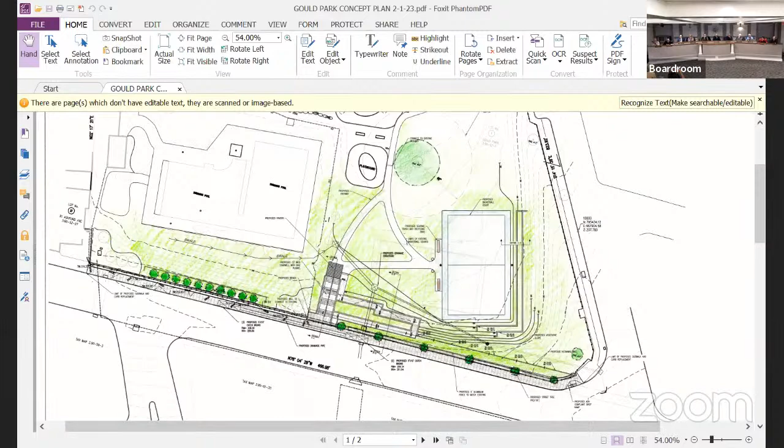In addition, we've done some landscape seating. Those of you who've been in the village for a long time may remember an interesting seating concept at the corner of Maple and Washington on the lower field, which had amphitheater seating carved into the hill. So we're going to reintroduce that idea here at the park.

So I'm going to let Suzanne and Anthony take over from here. But the focus for tonight is really two parts. One, I would like the planning board to be a part of any village-related project going forward. I mean, it's just obvious why, you all know that. It should have happened many times in the past, and it will happen in the future, so this is the first of those.

We just want your input, because you've got a lot of value to add to our projects. We want those voices in these projects, so give us your feedback. We'll take it back to the committee, go through all these things. If we have questions, we'll come back to you. But we'd really like to embark on the design phase.

Anthony, we keep giving him harsher and harsher deadlines, but we aren't giving him the go-ahead to start his working drawings. So the idea is we want to give him some guidance here, and as we develop it, we'll come back to you again, maybe a little less formally. We can work that out as we go forward. So I'll let Suzanne and Anthony take it.

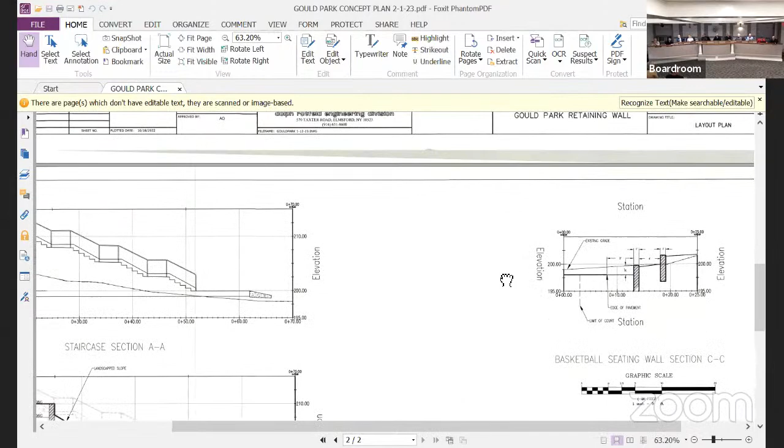There are some cross sections here just to give you a sense of the scale of the steps — again, this is at a conceptual level. This is a cross section through the ramps. It may not make too much sense, but it shows how the ramps step down, the two switchback levels of the ramp, and starts a cross-section on the seating here.

I think the seating steps were about 20 inches high. Trustee Patino mentioned the subcommittee has been working with us and started looking at materials, but there's really no consensus yet. I think it's gravitating toward more of a natural stone finish, but steps would probably be poured-in-place concrete. There's talk of different tread materials and so forth, but that remains to be seen.

What we're really looking for at this point is to get the program down so we can move into design drawings on this. But that's it in a nutshell. I don't know, Suzanne, if you want to add anything on where the landscaping would go in your view.

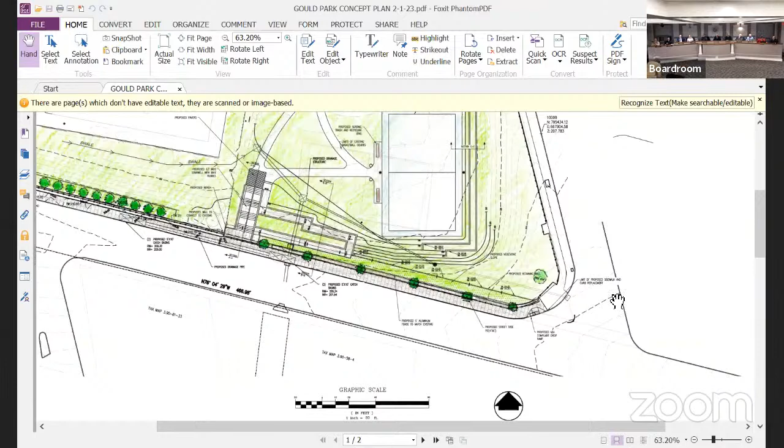I'm Suzanne Nolan. I consult to the Village of Dobbs Ferry on landscape architectural issues. Getting involved with the subcommittee, there was an opportunity to start connecting disparate interventions that were being considered in the park.

There's some screening that I had worked with the Parks Department on, looking at for the pool area, because there's been some talk about needing screening for pool users. That was an opportunity to start looking at this more comprehensively rather than just placing different things in the park.

Working with the subcommittee, the idea came about that shifting the basketball court — realigning it, even shifting it into the slope — would allow for this terraced approach to the seating, which would also allow for a more open feeling in the center of the park, enabling a more elegant connection between the playground, the new entrance, and the basketball court.

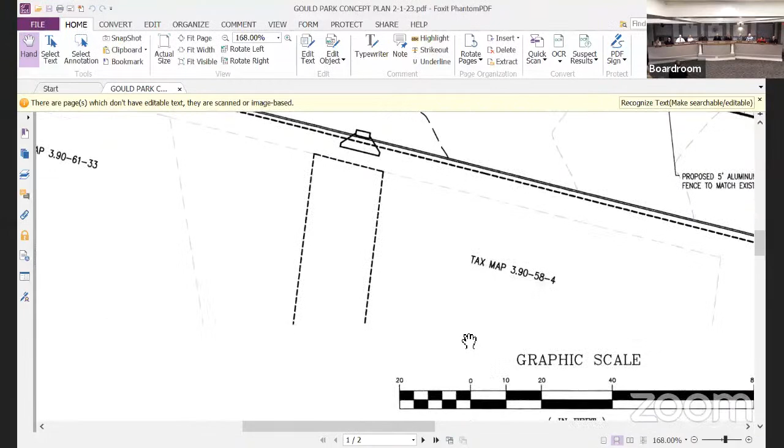But I feel like it's worth some study to figure out how much you can make the ramp feel like it's working with whatever the new grades are. That would be the only design-related thought I have. It would feel softer, more organic with whatever you're doing with the topo.

I just realized I did not show this elevation. It's kind of long and flat. But looking straight head-on, maybe I can make it a little larger. From the park side, looking at the stairs and the ramp, it's pretty gradual. By the time the ramp gets down, we're pretty much at the flatter area. There's a pretty sharp slope in front of the wall, so there's not a lot of topo to work with other than that first 20 feet maybe.

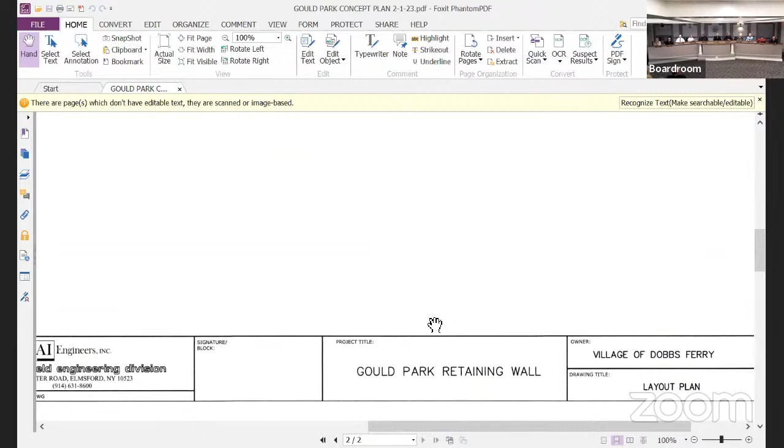Good. Well, thank you very much, Michael, for sharing that with the planning board tonight and with our audience. And we look forward to enjoying our new park in the spring or summer or whenever.

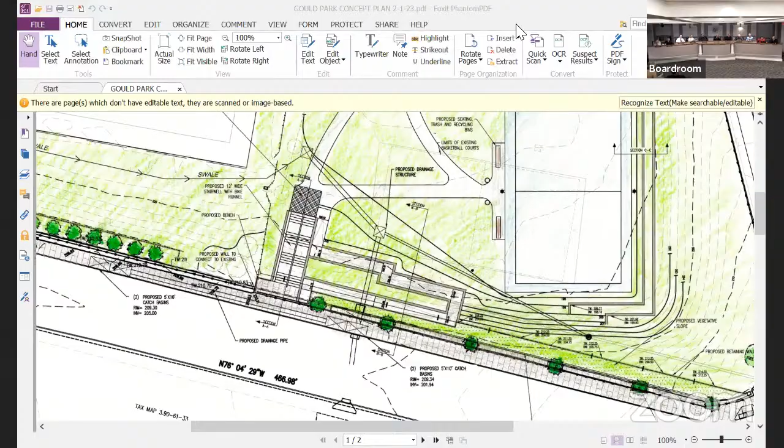Thank you. All right, we will move to the agenda of the planning board. Our first item, number 1, is North Mountain Drive, a pre-submission conference for proposed plans to construct a new home on a vacant lot.

Good evening, as they figure out the technical issues. Yes, I will entertain you. Good evening to the audience.

Chairman Hunter and members of the planning board, Kristen Wilson here representing the property owner, known as the Golio residence. You might be surprised to see us back here so quickly. At our last meeting, you sent a memo to the zoning board indicating that you did not see a reason why you cannot fit a single-family home on this lot.

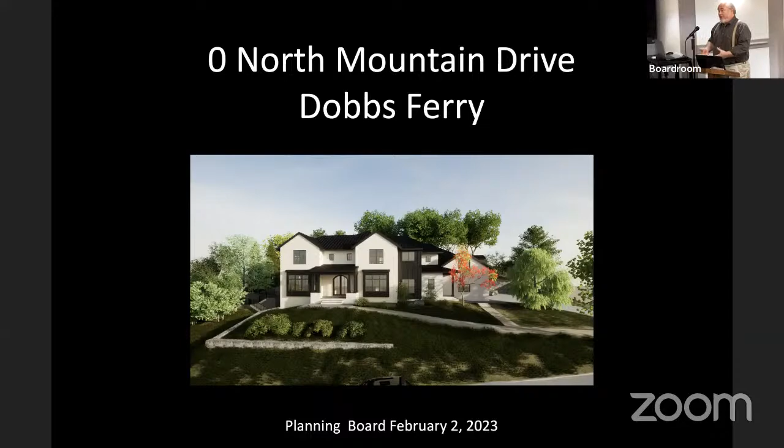And what we've done, because we are now actually looking for you guys to call for a public hearing and actually make a decision on the site plan, we've advanced this a little bit so that we've got things further developed than before. I'm going to try and skip most of the stuff we've already looked at, but if you see something you want more information about, some of these I just included because there were questions Anthony had about drawings and what we were submitting. I think we're in good shape with all of that now.

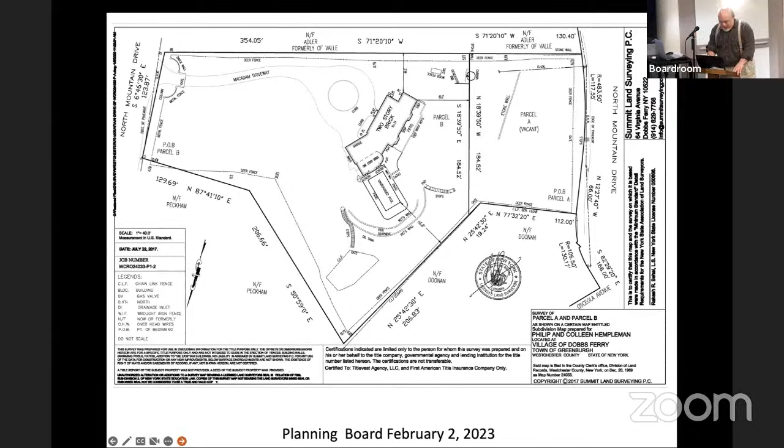I think we still come down to the same six primary concerns that were identified by the zoning board initially and then addressed by this board: stormwater management, vehicular safety, size of house, site stability, and landscaping.

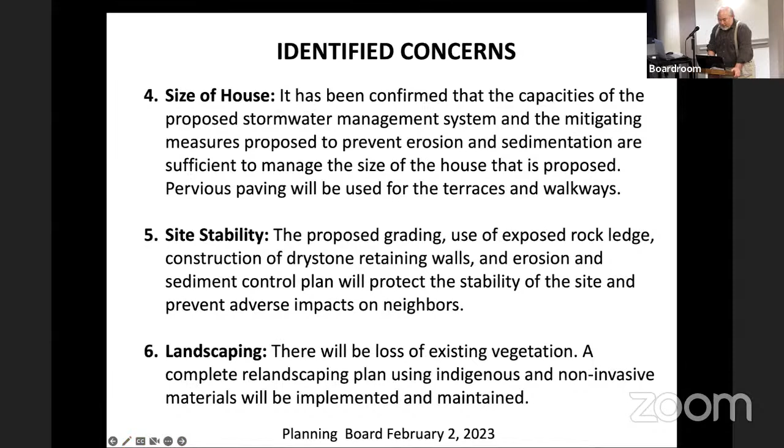And what we've done is we've brought the engineers in to get more involved. They have submitted their drawings, whether it's erosion, sediment control plans, or stormwater plans, and those have all been submitted to Anthony's office so that he's been able to give a review.

We've got a letter from him, and there are some things he thinks need to be dealt with, which I'm sure they do. We can certainly handle that between now and the next meeting. I also got Valerie's comments. I differ on one point, but I don't know if we should get into that during the meeting. It's just an interpretation issue in the code, but we can talk about it as we go.

What Hudson Engineering has done is design a stormwater storage system, retention and detention, that takes all of the water and dissipates it on site. So it has the capacity to handle a 100-year storm.

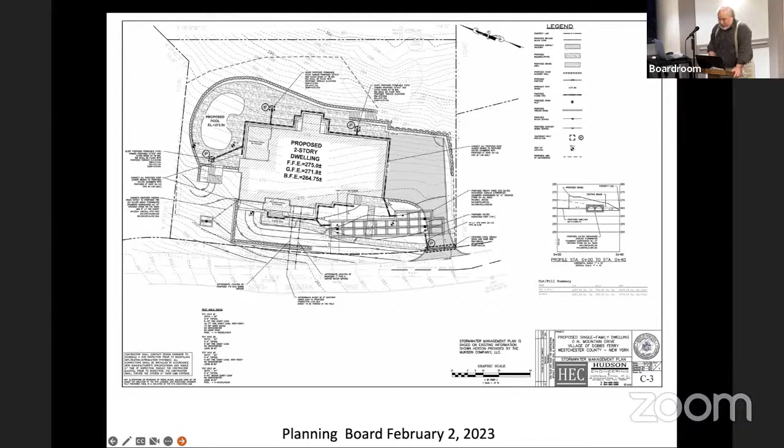There is one concern that Anthony had, which is that they're showing 8.5 feet to the property line when we've said it should be 10. My understanding is we do have a little bit of jiggling room with that. We can get it to where we're 10 feet from the property lines and 10 feet from the foundation, so I don't think that will be an issue.

One of the other concerns that was expressed—here's information on the storm drainage confirming that they're designing for a 100-year storm event from the watershed and keeping it on site.

One other thing I wanted to point out was a comment some members of this board had, about doing some things with permeable pavers. So what we've done is shown permeable pavers for all of the walkways and the terrace around the pool.

We have not used the capacity of that storage system as a way of reducing the Cultec. The Cultec stays sized for a 100-year storm, but in addition, all the water that falls on the terrace will be able to capture at least a 10-year storm.

We're basically coming up with around 5.2 inches of rain that could fall on that before—we're getting that about every 3 weeks, right? So we'll be able to take 5.2 inches of rain falling on the terrace without it having to go immediately to the Cultec units.

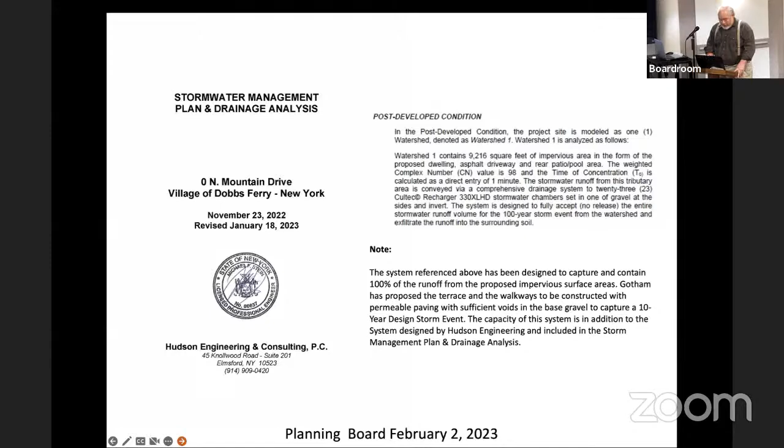We will need under drains in the event that it doesn't percolate in, but that all seems pretty straightforward to do. This is just information that was in this—

You've gotten this before. The perception is that this is a mountain of rock. The reality is we've dug test pits that are 8 feet deep in dirt without hitting any rock, so it promises to be good. They did that in the area where they're showing the Cultec units, where the actual grade is substantially less than 15%.

They found the one place on the site where you could kind of fit this in. There are a couple of little smidges of green hitting it here and there, but we're not trying to put something on a steep slope site.

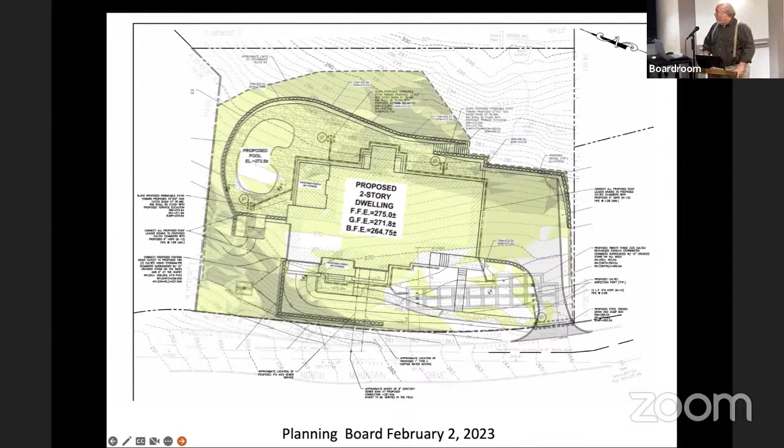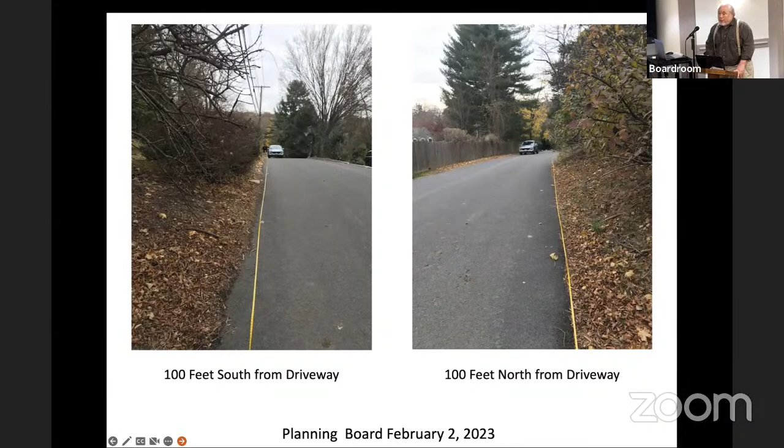One of the requests Anthony made was that we provide a profile of the driveway, which we actually had already provided. That was in there, so I think we're good with that stuff. We also made sure we've got good visibility up and down the street from the location of the driveway, so I don't think the board needs to have further concerns with that.

This stuff I'm going to skip because it's actually what I'm going to talk about with Valerie, and for all intents and purposes it was not something that we submitted to you guys for review. It just has to do with certain interpretations in the code.

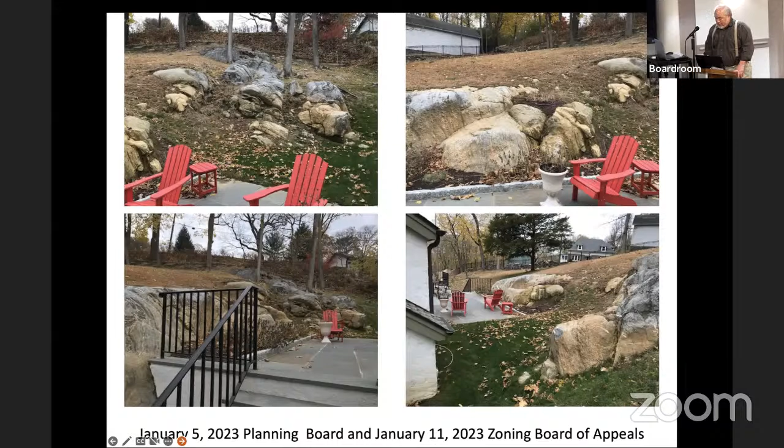Again, our goal is to do what we've done before in Dobbs Ferry. When we find lots of rock, we don't take it out just to build a retaining wall—we use it as the site. Of course that means we'd have to submit drawings showing all of that to the building department so they can be satisfied with how it's been done.

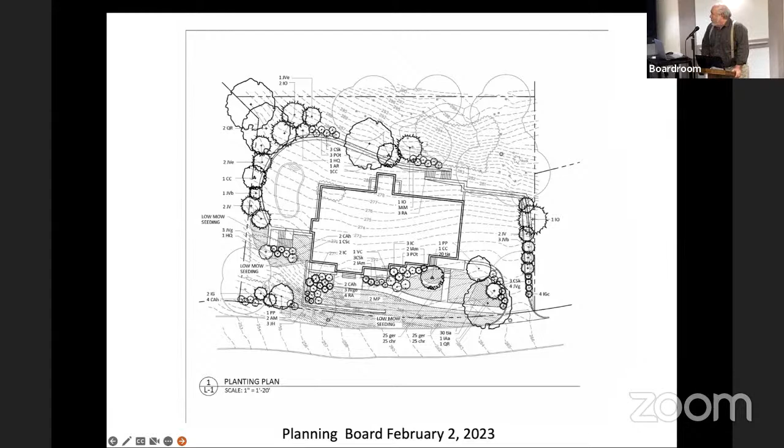This is the landscaping plan. There was a comment that this was underdeveloped, but I'm not really sure. Actually I'm a little concerned whether we'll have to go to more than one nursery to get all the plants for this property. It's a fairly extensive landscaping plan with material done by Susan Janchill, who's very experienced with this area. We've worked with her a lot and she does good work.

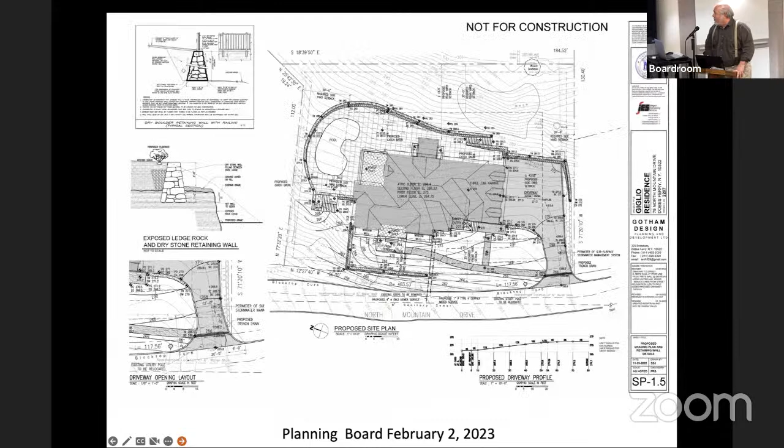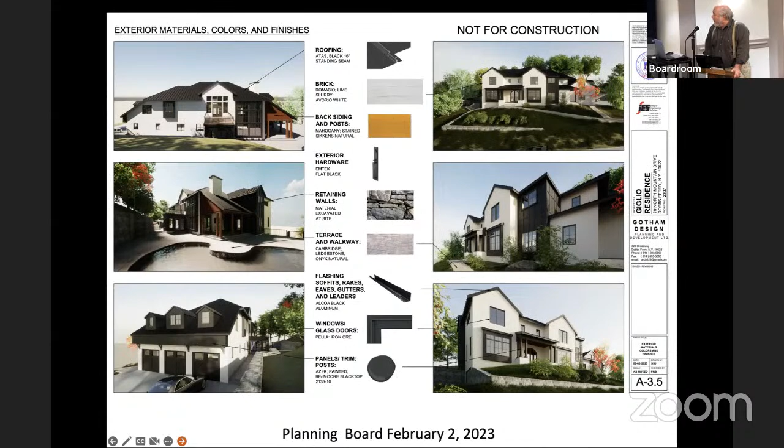These are the drawings we submitted to you, taken a little further. I don't think we need to bog down since you've already seen all that. We've taken the drawings up to quarter-inch scale, with elevations now relatively complete with detailing, material selected, colors, all of those kinds of things. Still noted not for construction. Basically it's a brick and stucco building with additional pieces done in a panel stained a very dark black, like a blacktop color. We also have some wood elements to soften it, but it's a look the client specifically requested. We've taken some of the images up so you can see them better. This goes into what all the materials are, which we'll have for the public hearing.

And then we've got a number of images showing how the house sits into the hillside.

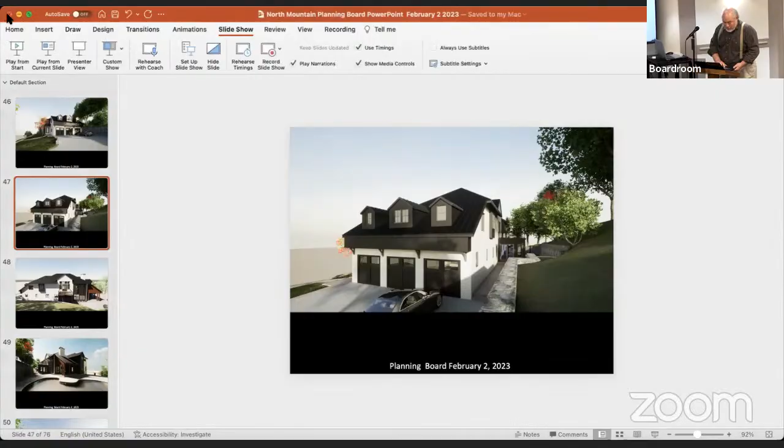If something didn't go wrong with this presentation and the equipment, I would be disappointed.

Patty, I go up and down North Mountain once in a while because it's curling season, and I have yet to really identify where your cut is for the driveway. We could flag it, put flags there. That would be helpful, because it's pretty much a big stone wall around those corners. Where the driveway is, it's right on the edge of the property. We're using the topography to reduce the pitch of the driveway on the upside. Well, put some flags where you're going to put your driveway, because it's not at all clear to me where that would be. And if you call for a public hearing tonight, I'll put another sign up.

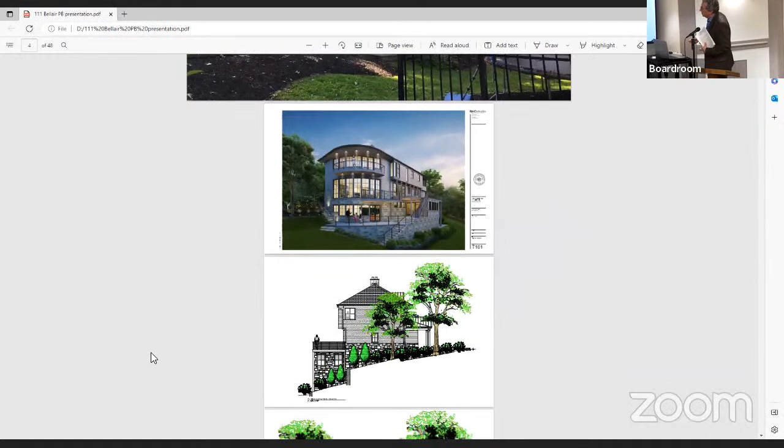And then we're also proposing an addition underneath this deck, a sort of basement level addition, and an addition on top of the garage, which was shown in the previous slide. If you scroll down a bit more you can see the rendering of the back elevation. This curved portion of the addition is essentially where that curved terrace is on the existing house.

The main body of the house going south is essentially the same as the existing massing, with the exception of this cantilever portion on the second floor. And then again, there's the addition on top of the garage, which you can see just a little peek of in this rendering.

And then there's stone terracing as the property drops down towards the west. And of course, this elevation is meant to take advantage of the nice views of the river and the Tappan Zee Bridge, which is off angle from this elevation.

This is an elevation of the south elevation of the house, because we don't have that in the rendering. As you can see... oh, I have the cursor, sorry, I'm trying to point at the screen. Oh, I can't use the cursor. Anyway, so...

This shows an addition above the garage. That little window is the existing garage, and in fact that small window is there now, just more or less the same size. We did receive, I failed to mention, we have a covered front porch as part of the addition, which we received a zoning variance for.

It actually basically complies with zoning regulations because the zoning permits a covered porch that extends 10 feet out into the front property line and is no more than 50% of the length of the house. This is slightly more, I don't have the exact number, but about 12 inches longer. So as I said in the zoning board meeting, it complies with the spirit of the code, certainly.

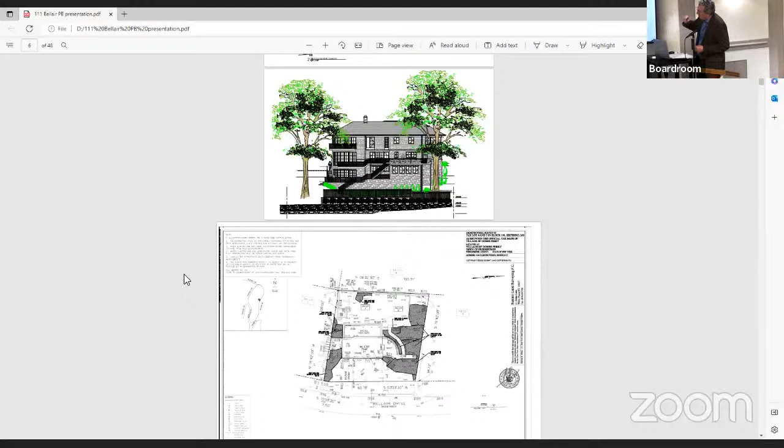If you scroll down to the next slide, this shaded area at the top is the extra area we can allocate toward what was the steep slope area underneath that fill. The average grade from the base of the house to the existing stone retaining wall is 14%, so we are most certainly lower than the 15 to 25% grade that this shaded area designates.

In addition to the additions we're proposing, we're also proposing to put pervious pavers on the existing driveway and create a little parking area to the south to comply with the requirements for 2-car off-street parking. It's also nicer for the owners to have the cars side by side rather than stacked back to back.

You could go to the next slide.

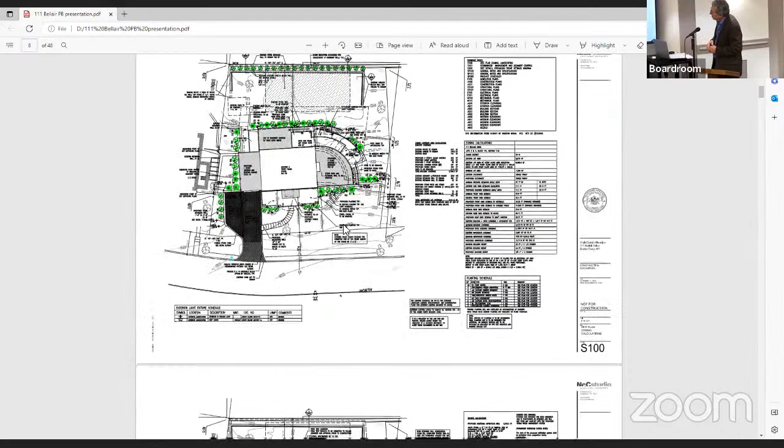As part of when we were here last, we were requested to do a perk test. We had an estimate of what the likely perk test would be based on other projects I've done, and we accomplished that. It's actually slightly lower than what we anticipated, which would allow us to take out one infiltrator and add a little more gravel, but basically it's the same proposal.

I would also point out that the infiltrators I have will accept all the stormwater from all the impervious area on the site, including the existing house. Typically you just provide stormwater management for the new impervious area, but we're providing it for the entire area, under the assumption that the existing dry well system is not adequate or not functioning properly. Although there's no sign on the property of any significant stormwater drainage problems, in any case the new project will manage all the stormwater as required.

This diagram shows the section I was referring to, this area here. This is the existing slope average grade, and this is the slope coming up prior to the addition of the retaining wall and build back, at 14%. We're pushing this wall back, and this is the slope we are allocating that extra steep slope area to, which again is in excess of the actual steep slope that existed prior to the building addition.

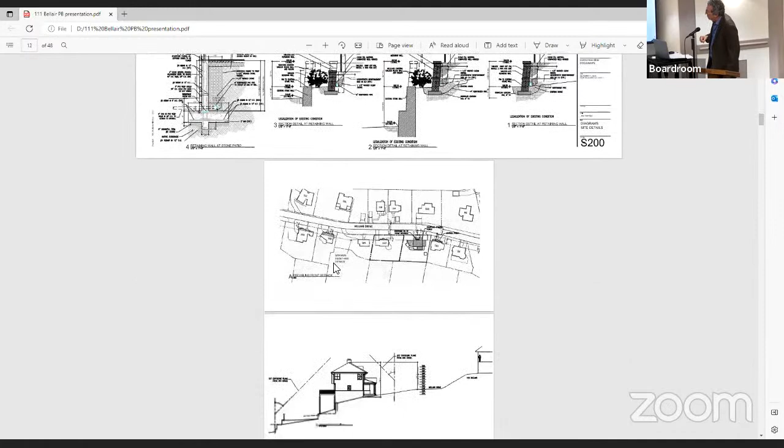That's meant to be an enlargement of the diagram on that plan, again showing the existing and proposed footprint of 111 Bellair and the adjacent houses.

One thing that was asked last time was to verify the view platforms, if there are any in this vicinity, and there aren't. The view platforms are further down as Bellair drops down towards Colonial and Palisade Avenue. There's really some dramatic views there, and this is not the case with this property.

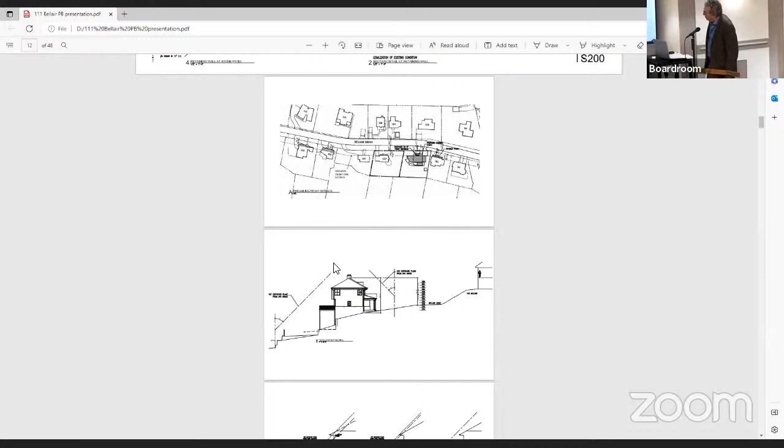Scroll down a little bit more. This is the sky exposure plane, to the south of the property. It shows the sky exposure plane front edge, the southeast corner of the property, the property line to the house. This outline is both the existing garage and proposed addition on top.

There's one taken at the center of the house, which complies, and then one at the very corner, which we're nudging just a little bit past. But if you look at the property, that zone at the southwest corner drops quite low. So as it relates to the neighbor's first floor, and actually the kitchen, which is closest to this, the sky exposure plane does comply relative to that floor height with the current code. I'm disappointed we can't see these bigger.

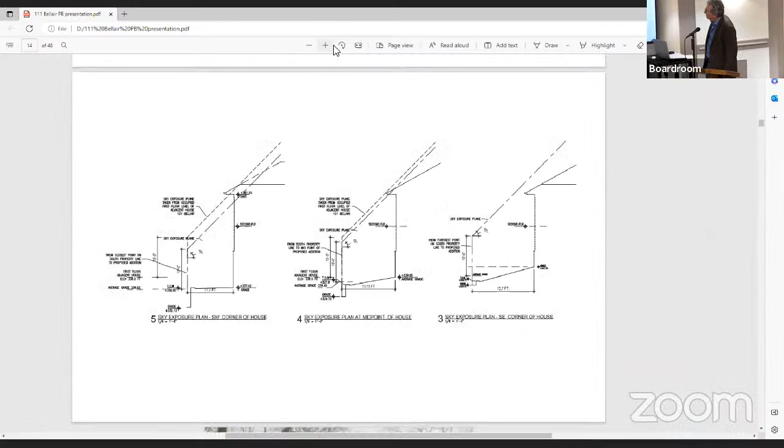Oops, what's happening? Oh, what'd you do? Help in the back, you did something. Oh, you're zooming in a little bit, okay. Yeah, that's good. Oh good, so some technical help from the owners of the house, free of charge.

So again, this is what I was describing. Now you can see it a little bit better, the relationship of the houses, which is not uncommon relative to typical side yard setbacks. And if you scroll further, you see the ghosted image of the proposed house.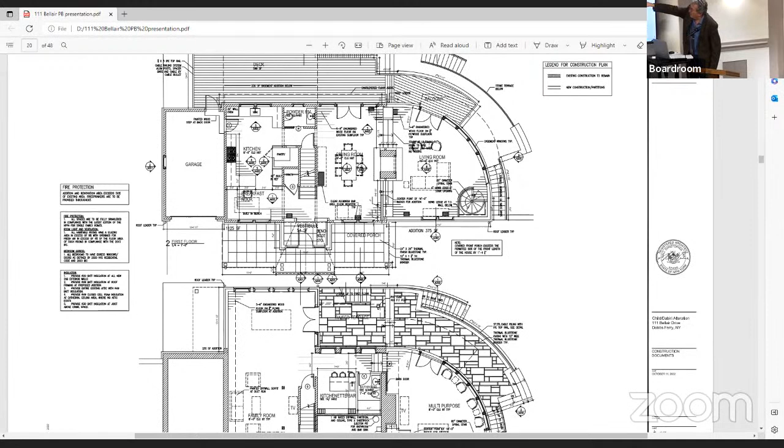It shows again the addition to the right, the curved bit here. That large balcony is really existing, with the exception that we're pulling it back 4 feet from where it is now. There's a little new curved balcony here, and some terracing and stone steps. The covered porch is proposed, and we got the variances required for that.

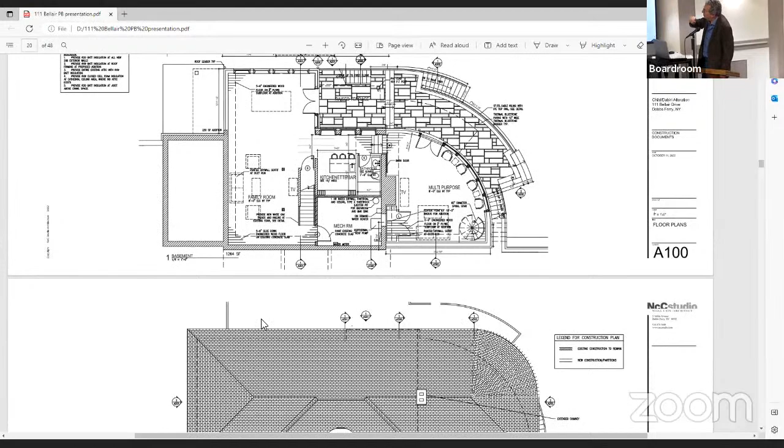This next plan shows the little basement extension at the west side of the elevation of the plan. Just the roof plan, shows the plan of the upstairs, that's okay.

And then this is the elevation. Again, the renderings really show this more specifically or more clearly than the elevations themselves. Again, actually, you can, sorry.

You can see we've made an attempt — the house is 21 feet 10 inches to the top from the curb line. We've really made an attempt to keep it low. This is a large house, but it's by no means massive. It's not out of character with other houses in the neighborhood. One reason the building area calculation comes up as high as it does is...

The code requires that any elevated deck be included. So really, the house could be much more massive and still comply, if there was a 2.5-story structure coming up from where the deck is. So in a way, those coverage calculations are a little misleading.

Yeah, again, it shows— I guess you can scroll down a little bit more. Yeah, this is that side elevation without the nice plants on it. It shows the garage, the dotted line of the existing garage roof, the dotted line of the existing roof, and then we're going up a little bit more.

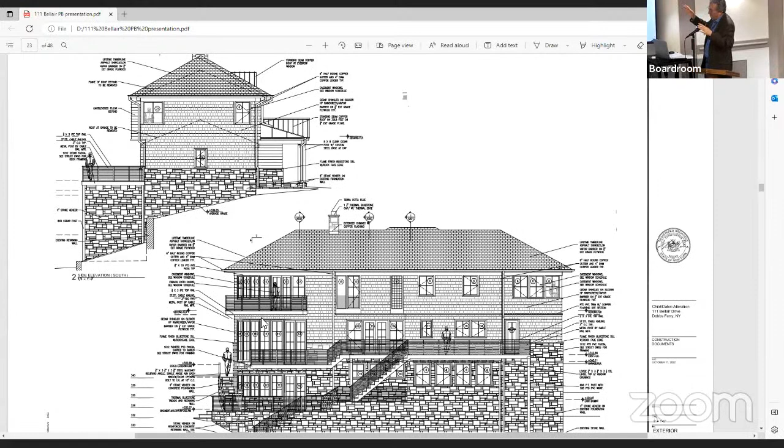One thing I didn't point out in the photographs is that this house is actually lower than the adjacent house at 101 Bellair, which has an occupied half floor. I can't tell exactly how much lower, but if you look at that photograph, since it's a dead-on shot, it shows very clearly that it's actually lower.

Again, back elevation—I think you saw the rendering, the same elevation with the fence in front of it, so it's a bit redundant. The sections through are really more construction-drawing type drawings, and don't have much more information pertinent to planning board review, I don't think. I can certainly describe them if you wish, but I think it's all—yeah, you can keep going down.

And then just a series of photographs. This is the back of the house currently. Again, the garage addition is going to be where that basketball hoop is. This is going to be pulled back. And the deck is being—well, it's going to be rebuilt completely. It just happens to have a similar size, but it's going to be pulled back from where it is now.

This is just an illustration here. When I calculate the sky exposure plane, I'm required to do it from this very low elevation at this corner, which the building code—I didn't print out the language—has language that allows for an allowance for that kind of aberration in terms of calculating the sky exposure plane from a point like that, which is right there.

And everything else other than that does comply, and this one largely complies. Another point I'd make is that with the sky exposure plane, there are allowances such as dormers, which can be 30%, or a third of the elevation, or 7 feet, and this little corner interferes far less with the sky exposure plane than a dormer would.

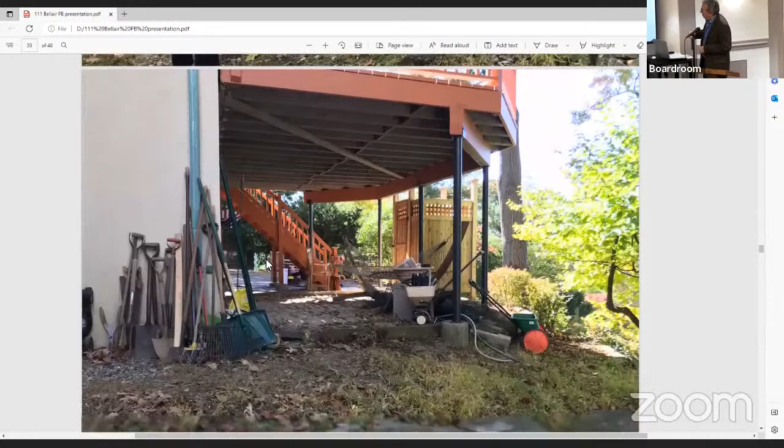This is just the adjacent property from the backyard. They all have these elevated decks, these houses, from the neighbors on either side, just given the topography, and beautiful views of the river.

And this is—I don't know why I put that one in there, actually. Are you going to do bathrooms next? What are you doing? Bathroom, yeah. Is this enough? I don't know. Yeah, it's probably. And then, yeah, this is, I don't know, I just threw some photographs.

Oh, I guess—do you want to see the neighborhood context? Okay, I mean, we can go up. Those are sort of the more—I'm sorry, no, you can go up the other way.

Just because, oh, this is important actually. This is the retaining wall that was built on top of the existing retaining wall. In fact, we started with the premise of, okay, let's try to legalize this as is, and we realized we just really have to push it back and improve the appearance.

So it's going to be pushed back again with extensive planting all the way along the side, and decent size plants. They're not going to have little puny potted plants. The sizes on the drawings, I can't remember exactly, but they're good size plants. And again, the neighbor to the west is very pleased with the proposal.

This is the existing wall. We're going to take this down by 2 tiers, 2.5, hoping. And because when this was done, the contractor was not aware, I guess, that, as many of you probably know, if you start filling dirt around an existing tree, you will probably kill it. It's not healthy for the tree. So we're going to take that all down so that the grade around the tree remains as it was. Take this corner down.

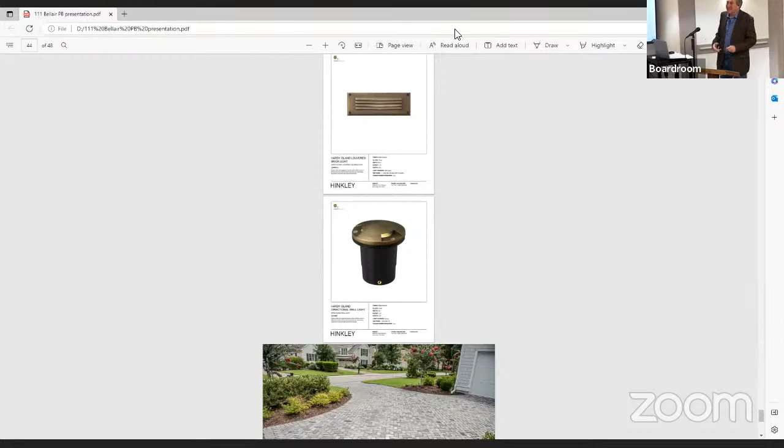The chairman, I'm sorry, you wanted to say something? He wanted to close. No, I was going to say that it's a public hearing, and I was going to ask if anybody wanted to speak. We have some people here. Yeah, present. Well, anybody that wishes to speak, please go to the microphone.

Thank you now. Good evening, Mr. Chairman, members of the board. My name is Stephen Accinelli from Veneruso, Curto, Schwartz, and Curto. On behalf of the owners of 101 Bellair, they are here with me this evening. That's Natalie Trojan and Bruce Jonas. I'd like to start out with congratulating the village for its very comprehensive vision plan, zoning ordinance, and residential design guidelines. I have reviewed them in detail in reviewing this application. And I've also reviewed the pre-submission hearings and also the zoning board hearings.

And I'm here on behalf of my clients in opposition to the application as it currently exists before this board. There are a number of significant issues that this application presents in terms of character, as well as in terms of specifics and technical issues that I think this board needs to really take a hard look at when they review and consider this application.

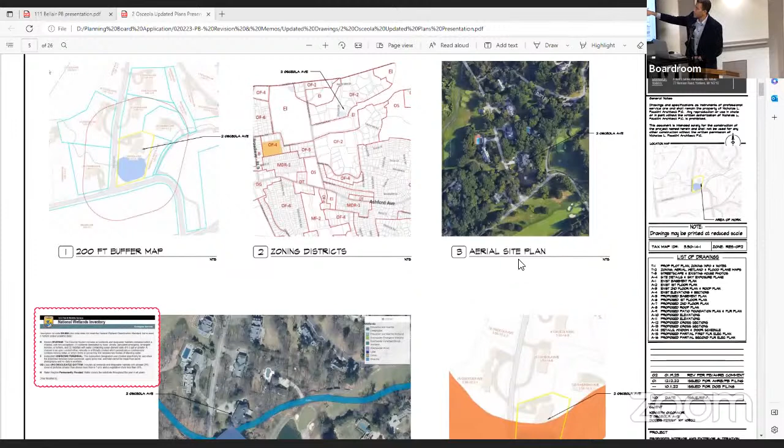So we can start to scroll. This page would be great. Again, we're just showing the pond, the zoning map, aerial view. Down here on the bottom right, if we scroll down a bit more, it shows that stream, as I was mentioning, continuing on the left side, going into the pond and continuing on the left side. This is the 500-year floodplain, which is not subject to the application.

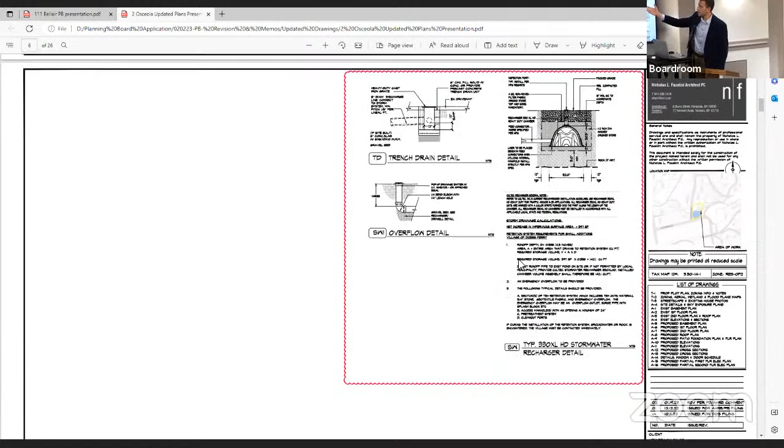We can keep scrolling down. Stormwater management design was introduced. We did receive a memo this month saying the dry well we propose is too close to the property line. We had set it back 5 feet, but we're more than happy to move it to 10 feet to comply with the village code. We have plenty of room to do so.

Can we continue to scroll down, please. A landscape plan was submitted with the initial submission, but the board or planning and engineering didn't have an opportunity to review it, or it wasn't part of the package. This is the landscaping plan—if we could scroll down a bit more. We have plantings shown along the front of the house, along the entrance, in front of the deck, and along the privacy area.

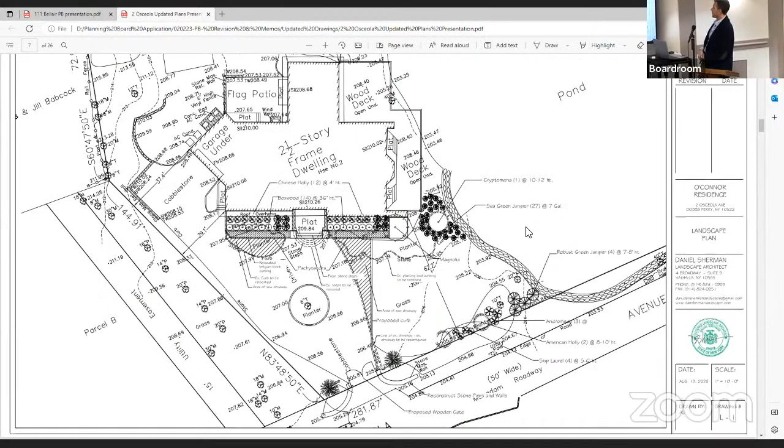A survey was also requested and was resubmitted as part of the resubmission. These are some photos, if we continue to scroll down, just showing the existing home at 2 Osceola Avenue. We have a view up Osceola Avenue, a view of the front, a view of the pond, another view of the pond looking toward the subject house, another view of Osceola with the pond and house in the distance, and some close-up photographs along the perimeter of the house.

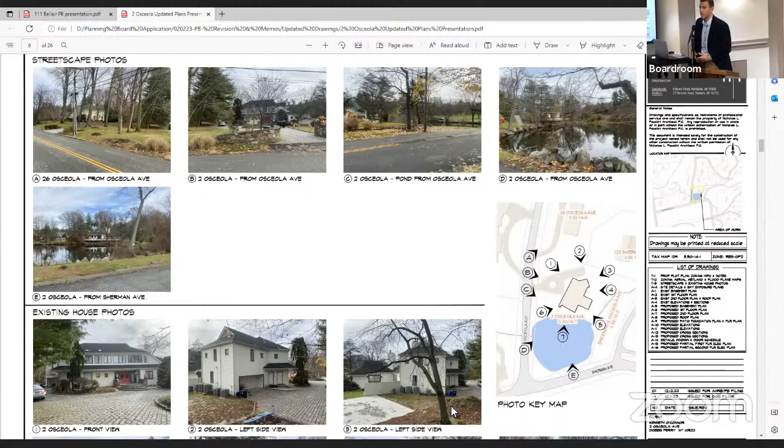The house is somewhat of a mixed contemporary traditional style, built in the late 90s, early 2000s. The owners purchased the house over a year ago and are interested in updating it, bringing it more into a somewhat contemporary appearance. We can continue to scroll down—sorry, this is a view of the pond.

So again, there was concern about being too close to the pond. The work we're proposing involves the footings supporting the elevated deck. So while the deck looks like it's immediately adjacent to the pond, the footings are set back somewhat. There's currently substantial cantilevers on that deck causing deflection—you can see posts underneath trying to push the deck up because the cantilevers are too excessive. We're going to reduce the cantilevers and better support the deck.

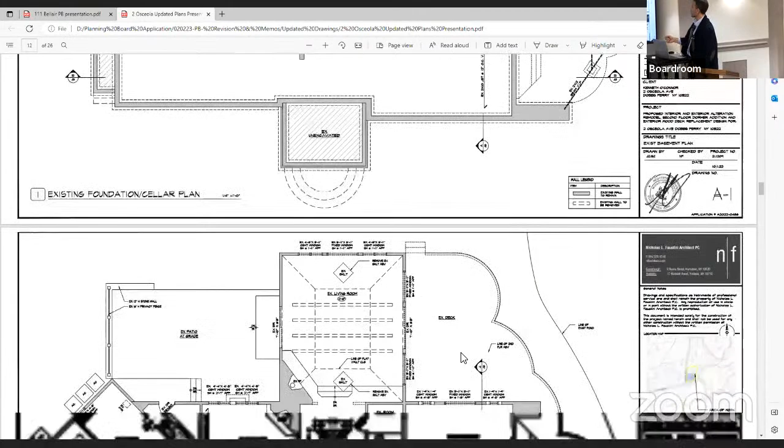We can continue to scroll down. These are just some engineering details, sky plane details, and the foundation plans. I'll go through the old footings, the old outline of the deck, the existing floor plans, the existing second floor, and existing elevations on all sides.

Proposed deck plan, just squaring off the edge to give it more of a contemporary appearance. This is the foundation plan—it's a crawl space with a very small mechanical basement. Keep going down: first floor plan, most of the work is interior. This is the deck plan; it didn't fit on the page, so there's a match line, and you'll see it on the next few pages.

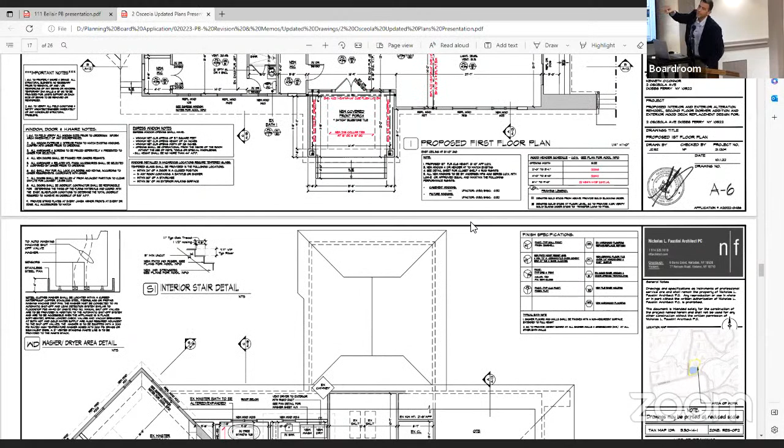We can continue down. We are proposing a portico, a covered portico in the location of an existing uncovered porch area. We can continue to scroll down—there's that small dormer in the back to add a master bathroom addition and a laundry room.

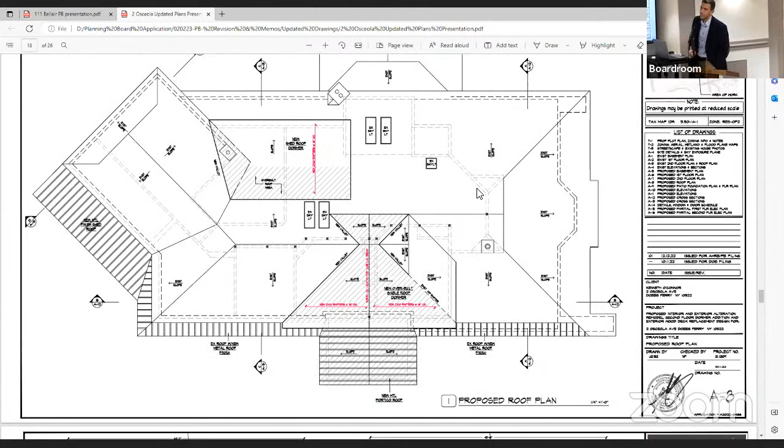Again, the dormer roof lines. We are introducing a new gable dormer just for aesthetics over the front entrance, matching the existing roof lines.

These are the rest of the deck plans off the match lines. These are the new footings. The line of the pond is shown there as well. This is the new deck plan. We can keep scrolling down.

Proposed front elevation, again just continuing the roof line. It's a 9-on-12. We're continuing it straight up, and then returning it back down, just trying to define the front entrance a little bit more. And then we're also creating a front portico.

The roof will be black asphalt shingle. The upper part of the house will be white Hardie panel. The lower part will be charcoal Hardie siding. All of the windows would be replaced with black windows. And we're proposing a metal roof on the lower part, just to give it a little bit more flair.

We can go down a little bit more. This is the view of the pond side, changing the railings to more contemporary railings with horizontal cable rails. You'll see the dormer additions in the distance and the front portico addition on the left. This is the existing roof structure that's going to remain unchanged.

We can go down to the rear elevation. Rear elevation is generally the same, just new siding, new windows as discussed previously, and the dormer that we're proposing over the laundry room. And the master bath is in this general area.

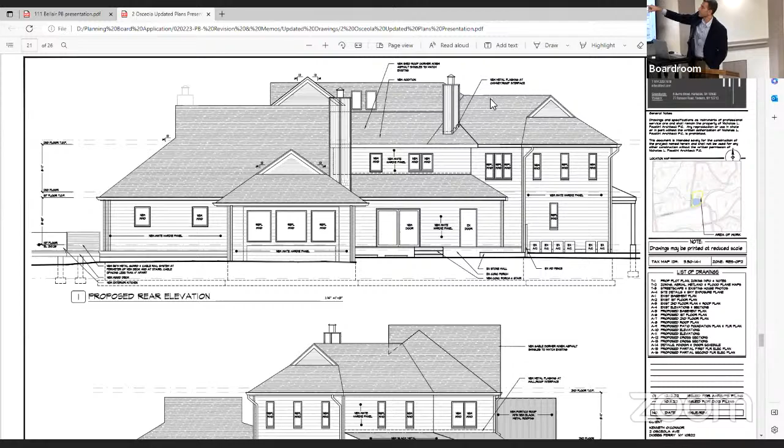This is the left side exterior elevation, and this is that roof over the garage that I mentioned earlier. The metal roof can tie into the front porch. And then continuing to go down, these are just some general cross-sectional details, architectural drawings that we can continue to scroll through.

Yeah, I think these are more technical drawings.

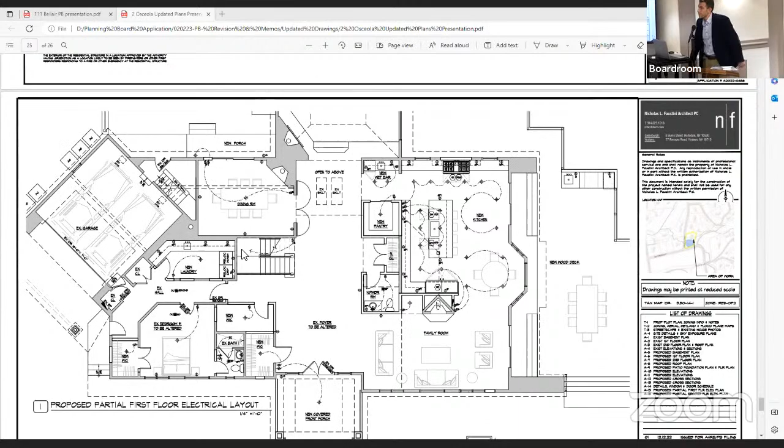Valerie, any issues from you on that? I was just going to add, I think the only way DEC would require a permit is for a Class C stream if there's disturbance in the waterway or on the embankment. As long as they're far enough back, I don't think DEC would require a permit here. But it sounds like they're not going to give those jurisdictional letters anyway. I didn't know that, but unless there's something else in the code restricting overhang over the pond... No, I didn't see any other restriction. It's just that the code deals with environmental features, to give consideration and try to avoid those as much as possible.

Well, that was my only concern. I think it's a nice project. Did you say you were replacing a footing, or pushing it back? We are replacing footings and adding new footings because currently the cantilevers are too substantial for those deck edges. And will those new footings interrupt the pond? No, they're held back away from the pond.

There was one in our previous submission that encroached on the pond. I pulled it back in this resubmission. We have provided erosion control details, as many as possible, to try to mitigate any kind of silt that might go in that direction, but all of the footings are out of the water line.

Okay, thank you, that was really interesting about the class of streams and what the regulations were. Did you know this before you started the project? I worked on a project in Pleasantville where we received a jurisdictional screening letter.

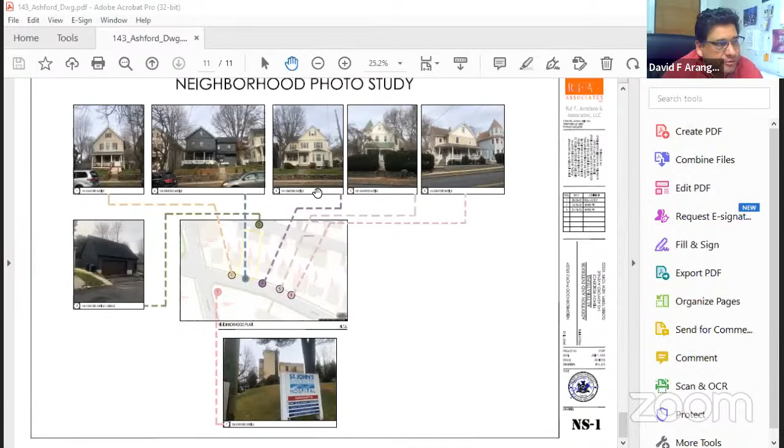That was the major concern of the board for the project, because the house is a little small. Mrs. Fishhoff didn't need the additional space on the top floor.

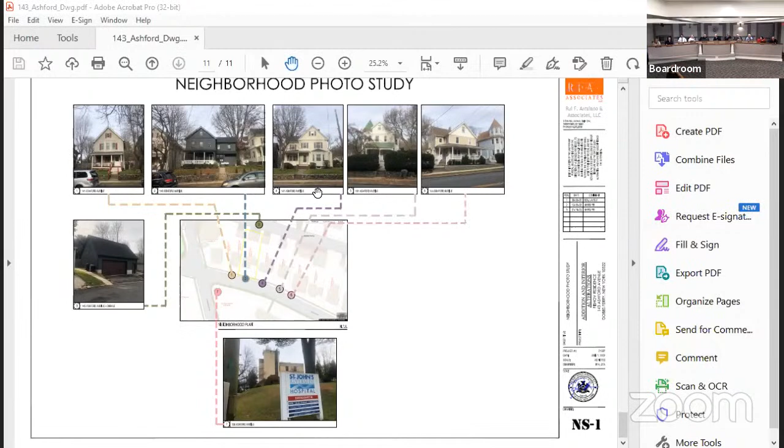Is there any questions from the board? No, I think it looks great. We make a little change to the siding at the top so it doesn't look too plain, making more of an effort to make things better. Yeah, I think it's a nice addition.

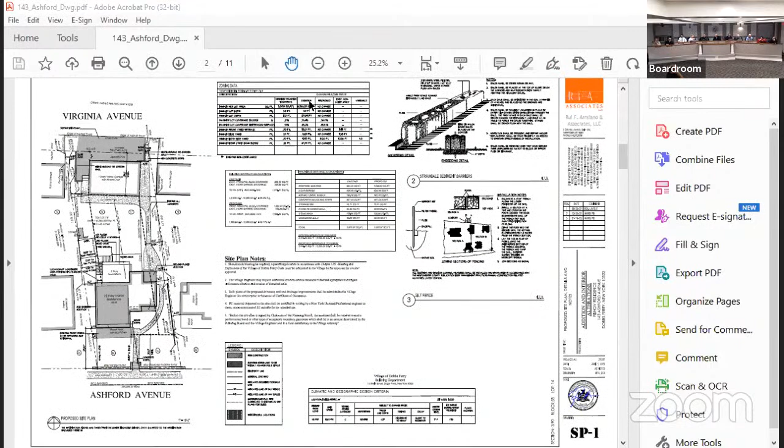I don't see height data in the zoning table. Let me see, we had it somewhere. Is it in the first one? Dan, have you looked at it? It's on one of the elevations, shows the height. It's one of the sheets that has zoning. Even with the new addition, yeah.

So I'm sorry, is the new design compliant? Yes. No, the height hasn't changed with the new design. Really? Correct. The roof height has been raised up, so there could be an issue. The roof height is definitely higher, unless because it's more sloped it's calculated differently. I wasn't here last time, so the same height went out the side? He added that whole triangle. Right, so we don't have the height on that. I don't have that. Okay.

So David, you need to get us height data. He might be going back for a variance. He already went to zoning for a couple of variances, but that was before the massing changed.

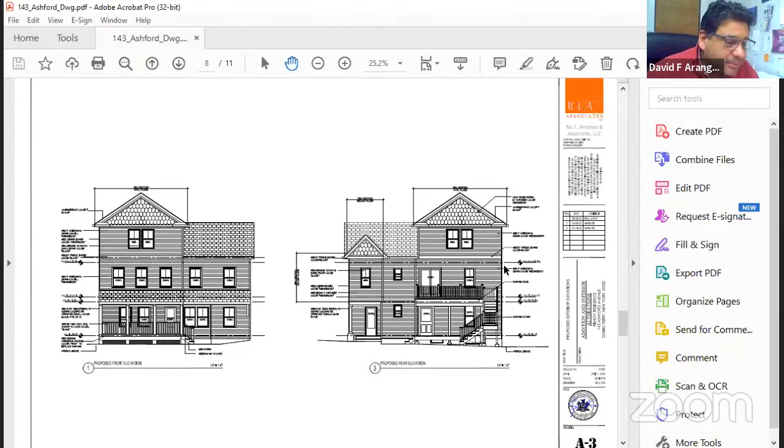You could call for a public hearing, and if for some reason he has to go back to the zoning board, you can just adjourn the public hearing. Okay, all right, let's do that. Is there a second? All in favor? Aye. Okay, thank you. So you have to come back with height data. Okay, no problem, we'll provide that. Thank you. You're welcome, bye, good night.

Good night. Next item on our agenda, item number 5, 231 Clinton Avenue, public hearing for proposed interior and exterior renovation and addition.

Good evening, my name's Dan Panesi, and I'm here for 231 Clinton. We had submitted revised drawings to address the planning engineering comments, primarily dealing with adding contours and some stormwater management. Based on the engineering comment letter yesterday, there remain two relatively minor comments, one being to clarify the components of the increase in impervious coverage of 1,075 square feet, and the other to make sure we properly size the Cultec. I'm here to answer any questions. I'm hoping that we can close the public hearing and hopefully issue a resolution, perhaps conditionally, upon resolving these two engineering issues.

We'll open the public hearing first. I move we open the public hearing. Second. All in favor? Aye. Okay, good.

No one is here to speak to this? Going twice. Do we have a resolution for this? We do. Then I move we close the public hearing. Second. All in favor? Aye.

Anybody here want to speak to this? Close the public hearing. I'll second.

It's been moved and seconded that we close the public hearing. All in favor? Aye. All in favor? Aye. It's closed. So you can read the resolution.

There are two resolutions. The first is the planning board resolution, whereas the applicant is seeking site plan approval to build additions to the existing house, including a new front entry porch, a new family entry porch, a 1-story library addition, a 1-story family room with a finished lower level, a first floor deck and terrace, a second floor roof deck, and a detached 2-car garage. The planning board conducted a duly noticed public hearing on February 2nd, which concluded that same day, during which all those wishing to be heard were given the opportunity to be heard and to provide written comments. Now therefore be it resolved, the planning board of the village of Dobbs Ferry determines that based upon the findings and reasoning set forth below, the application for site plan approval is granted, subject to the following conditions.

The approved plans, except as otherwise noted and provided herein, all work shall be performed in strict compliance with the plans submitted to the planning board, including the site plans last revised January 19th, 2023. And the following conditions apply prior to final site plan approval.

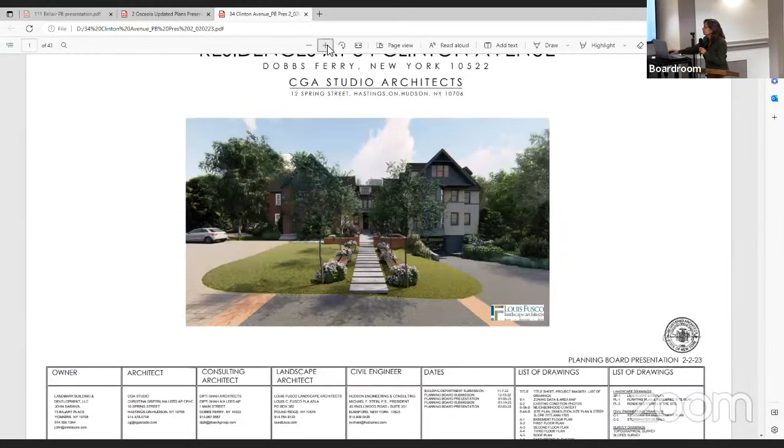Good evening again. Christina Griffin, principal of CGA Studio Architects. I'm here with Karen Schubeck, project architect, and Louis Fusco, the landscape architect, and the owner and developer, John Sarave. We'd like to show you the modifications we've made in response to your comments from the last meeting. I'd like to start with that, even though we did receive the memo from the village planner, but I'm going to look at that after we present the drawings, because everything we've done so far has been in response to that last meeting.

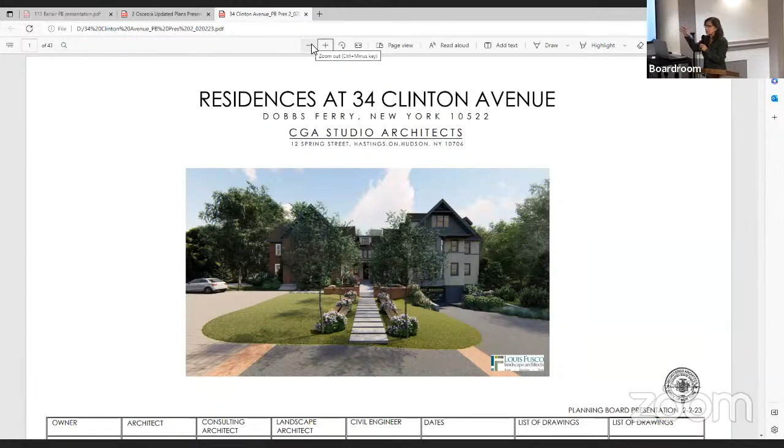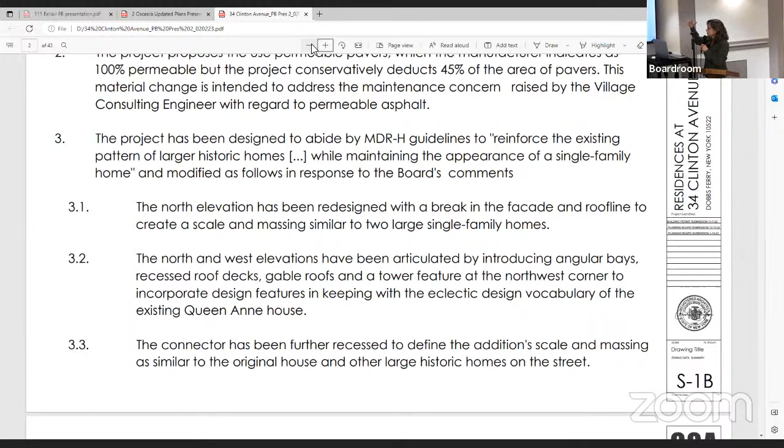We've changed our site plan to break up the parking. We have a new layout to show you in response, with more varied and more planted areas for parking in the front yard. We've changed the permeable asphalt to permeable pavers because of maintenance concerns, which we'll explain later. The third item covers the building, where we've made changes to the scale, massing, and architectural features of the sides and back to reduce mass and make it more in keeping with the original Queen Anne building on the site.

I'm going to go to the next slide. Okay.

The plan on the left is the existing conditions of the site, and the plan on the right is our latest site plan.

We are showing a central curb cut and 2 separate parking areas with a planted area in the middle, so that you can have a view of greenery and the courtyard when you're looking from the sidewalk into the site. We have planted areas breaking up these parking areas and a planting buffer, and I'm going to let the landscape architect explain that to you later in the presentation.

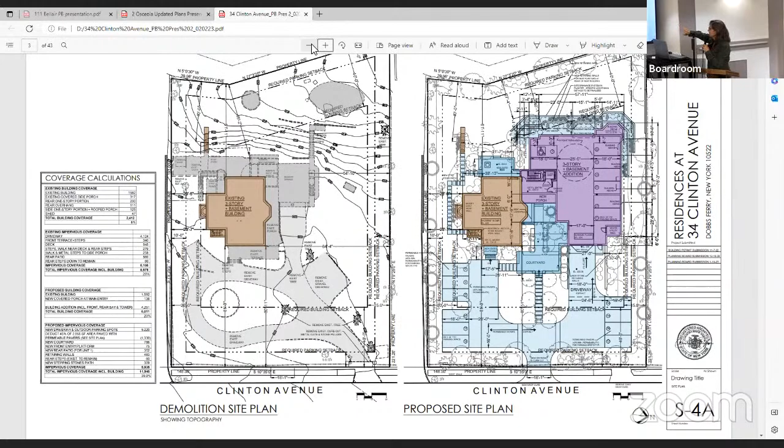The building on this level has not changed, except that we have pushed back the entry and the porch, because we're trying to keep that link between the 2 main buildings. We're trying to diminish it so that it really feels like you generally see 2 buildings, similar in scale to a big house from the view of the front yard.

Now our floor plans have changed. We have given articulation to the building. As you can see on the right, we have lots of jogs. We've broken the wall on the right into 2 pieces with a recessed area. We've introduced rectangular bays, angular bays, and a tower feature. We've tucked the decks into recesses so they feel more like balconies, treating them like you would see on a Victorian house. And if you see the colors, each piece of the building is more in scale with the original house.

This second level is very similar to the first floor level. And then on our attic, 3rd floor, we have reduced the floor area and tucked as much as we can into the roof, so that we have dormers and gables to provide windows into the space. We also have a tower feature.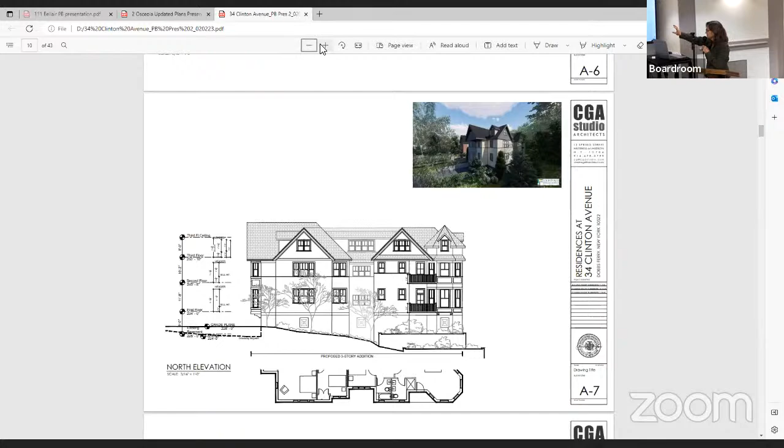And then on the west, the north facade, as we turn the corner - this is the north facade. We put the profile of the floor plan below the elevation, just so you can see how we have introduced a deep recess between 2 parts of the building. We're trying to give the sense of scale of 2 large single-family homes. We introduced gables and a tower feature, and tucked the railing into a recess for the deck.

And this is the west elevation. Similar treatment where we have angular bays, recessed decks, a large gable over a bay window, and then small dormers up at the attic level.

So, sorry to interrupt, this elevation is actually a little different than the one that is part of the submission? Better, I think, actually - we added more detail. I think we ran out of time on the deck door. We felt the deck was monotonous, so we decided to angle it and have it come out. We had it straight across originally.

Right, and also the fenestration on the sliding - whatever kind of doors, how do they operate, the doors out onto the balcony? Are they French or sliding? We haven't decided yet, we don't know. We'll get there though.

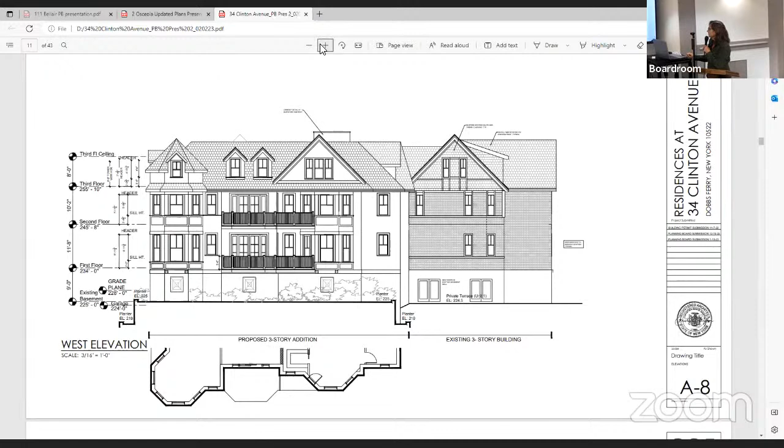We also decided we'll have an interesting grill pattern for ventilation into the garage level rather than more double hung windows. We also changed the next elevation as we turn around the building.

You see this south elevation of the building. Instead of a full height third floor, now we just have a dormer, a large dormer in this case, with doors out to a smaller deck, just to reduce the scale of that part of the building.

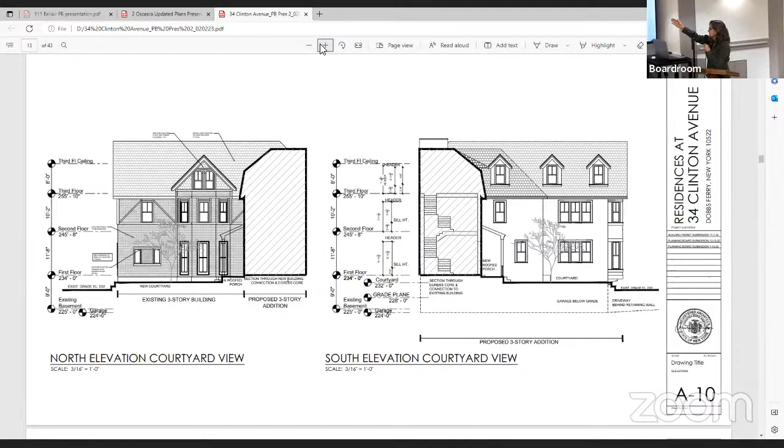And then these elevations haven't really changed, except we have pushed back the link between the old and the new. That elevation is showing the old building and that beautiful gable feature that exists. And then on the right is our new facade, which is pretty much the same as before, except the link is now on the third floor - everything is tucked in the roof line.

Now I'd like to have Louis Fusco, our landscape architect, take you through our revised site plan and also our 3D renderings.

Hi, I'm Louis Fusco, landscape architect with Louis Fusco Landscape Architects. As Christine mentioned, we really took to heart your comments about the parking in the front and the neighbors. We were fortunate enough to have a group of neighbors meet with the team to get their feedback and concerns, and we addressed that over the past few weeks, showing them this new site plan. The main changes we made were looking at different options for entering and exiting.

So this is a first rendering of that. This is a bird's eye view looking down in. You can see the coloration differences. To your left is the new permeable paver that will be used. We spoke with our client as well and discussed the differences between a porous asphalt and the possible additional maintenance as compared to the permeable paver. So the permeable paver we're selecting is both permeable itself as well as having a more open spacing in between.

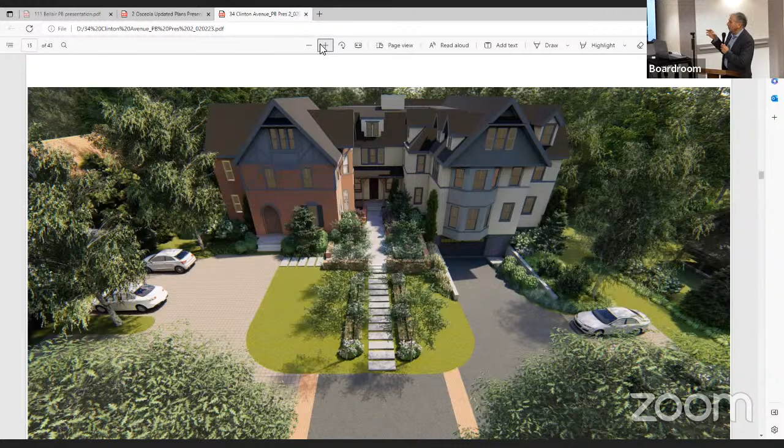The darker gray that you're seeing is traditional asphalt. On the right is another parking section. We've divided up the parking and planted it all up so that there's much more of a residential feel to the whole set. Thank you, Karen.

This is just a close-up. You can see the pathway where we'll have some benching leading to a plaza area between the two buildings, a seating area.

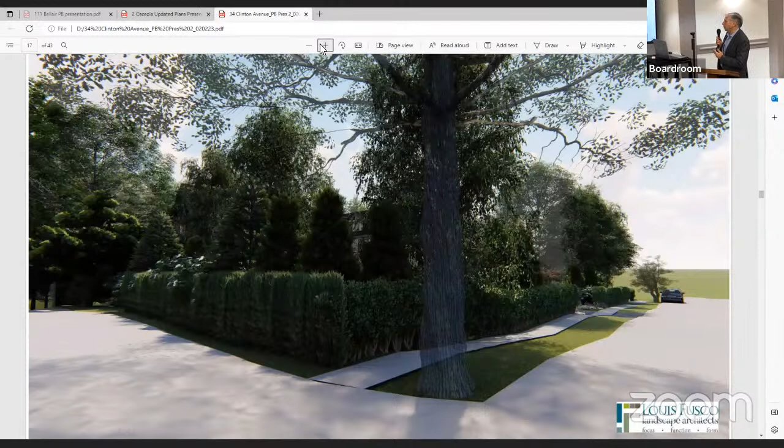This is a view looking down, just to show the existing 4-foot hedge that's there, which will be maintained and added to. Plus, we have a second layer of plantings. There was particular concern from the neighbor on this side about not seeing any cars, and we've added new evergreen and deciduous plantings between. You can see from the street on this side, we've totally blocked anything of the house, which is more in keeping with what the existing landscape on that particular side is right now.

Next, a closer up of the plaza in between, the space, allowing us to see the comparison of the two sections of the building and how they're joining, giving some open space for the tenants and residents of the building.

Here's a view of that lower area parking that's tucked off from the drive into the underground parking garage. We've allotted, I believe, 4 spaces on that side, and then 2 sets of 3 on the other side of the building, with planting in between.

A view back out from that entry towards the street, where you can see the layering of plantings we're proposing—on the inside, there'll be more ornamental. By the way, all the plantings we're proposing are native. Our entire planting palette is natives, but we've got a variety, so it's not just closed off—there's still going to be openness. That was a concern also, since it is a beautiful street and residence. We don't want to block the entire house, but at least do justice to blocking the parking and all, especially the one lower parking area on the one side, looking towards the neighbor.

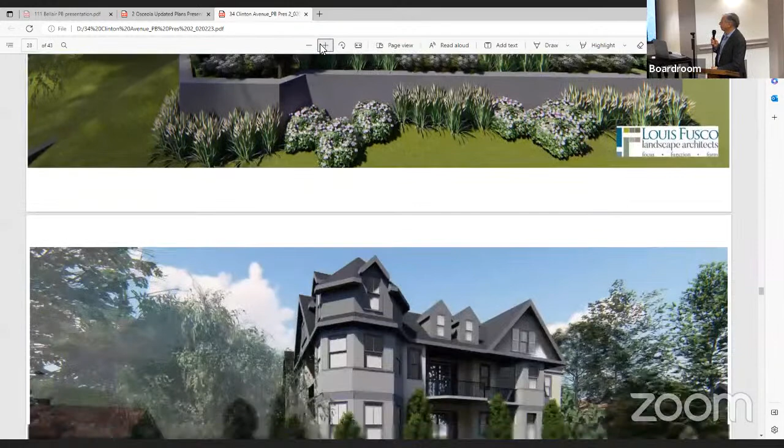Another angle, being able to show the different levels of landscaping there.

Back around to the front of the house, and that's the garage entry going in down below. One last shot that shows the different elevations that Christine was explaining about the fenestration on this side of the building as well.

Here we've just indicated the different surfaces, both the asphalt and the permeable paver. We provided details on the paving as well, since the board had asked for that, and that was added into the packet in the last submission.

Our full planting plan — trees, shrubs, and perennials — as I mentioned, are all native species that we're proposing on the property.

The stormwater has all been calculated. If there are any questions about the stormwater we could answer them as well, but the full stormwater package has been completed.

I have a question. The rear of the property is fairly substantial — is there any plan for access and recreation, a patio? I know it's maybe early in the process, but it seems like a waste not to use it.

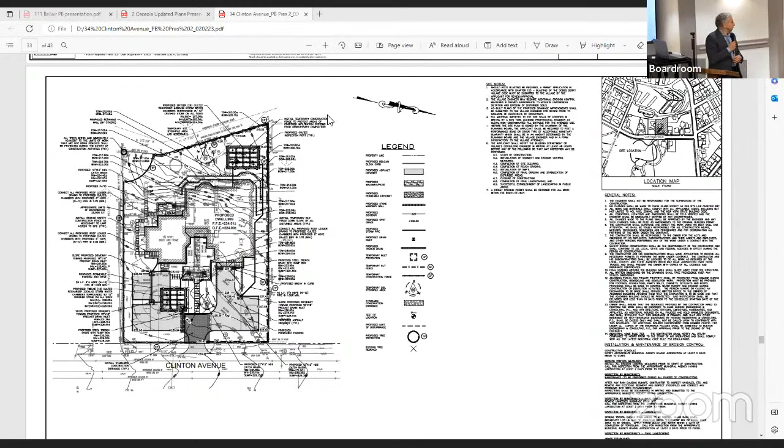We do have one patio space allocated to one of the units. The back property is accessible via a stairway going around — around the side of the building there are stairs that bring you down to the lower area, so the back lawn area can be accessible. Unfortunately, with lot coverage, I would have loved to have had another communal patio space, but we're right at the limit, so little kids running around is about as far as you can go. It'll be nice to have some green play space in an area like this, definitely.

That is the extent of our presentation showing our changes from the last time.

We did receive the memo from the village planner, and I'd like to say that we did our coverage calculations based on the gross lot area — I've done about 8 projects that way — so we were surprised to get that memo. We got one a month ago saying we're fully compliant with the bulk restrictions for the MDRH zone.

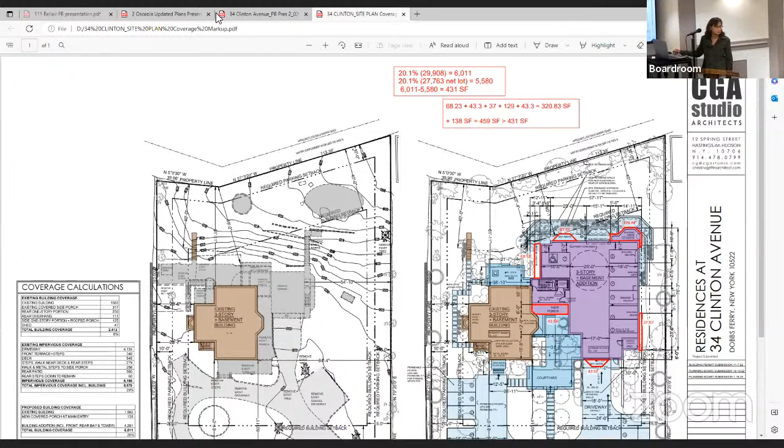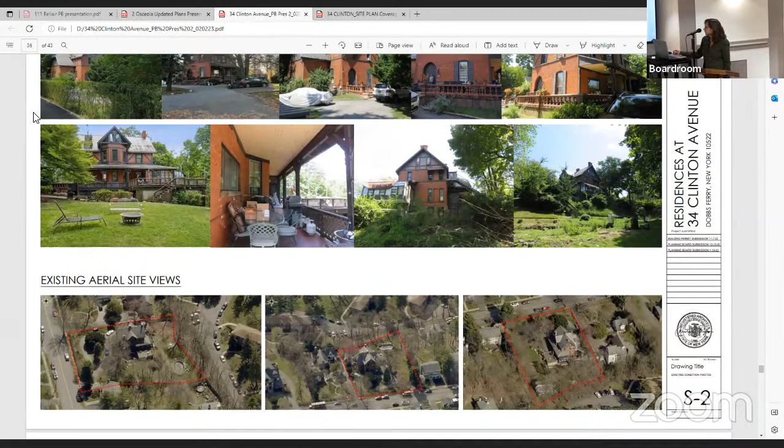I'm just curious, on the S-2 drawing where you have the aerials of the neighborhood and the site, the property line, all the aerial photos - have you superimposed the new building into this? I'm just curious what it would look like with the others. We have, but it was with the previous scheme. This is existing and this is proposed with the previous roof beam - this is the old massing. Because that looks really big compared to this.

And we did this also, made sure we included a lot of the area around it. I would suggest you update that with the new version.

I'm just curious because this appears to be a lot smaller, the way that you manipulated the facade going in and out. So I'm just curious what it would look like. We'll show that to you next time. I think you're going to see it looks very similar to a lot of the other houses with all the dormers and gables.

I would suggest rendering the roof the same way the roofs appear in this aerial. That'll help, because even if you show all the breaks in the roof form, if it's still presented in this monochrome way, it's going to look bigger than if you show the shade and shadow on all the different pitches, and get a better feeling for how it ties in with what's in the neighborhood.

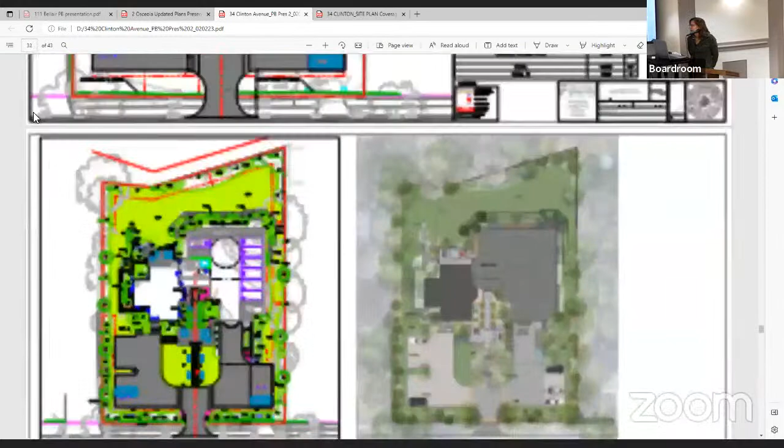In the renderings, the shadowing is east-west - is that pretty accurate, the sun shadowing? Because it's always a blue sky, I mean in terms of the direction of the sun and the shadowing - does that make sense? Our elevations are more detailed than these, but good idea.

Thank you, it's a great presentation. Looks really pretty.

Okay, well, so February 12th at 10 a.m., we will, some of us, all of us will appear.

Do you want the addition staked out for your walkthrough? What do you think - the foundation, we want it staked out, the size, the footprint, to see where the addition would be. It would be helpful. Just 4 stakes would be fine. We can do that.